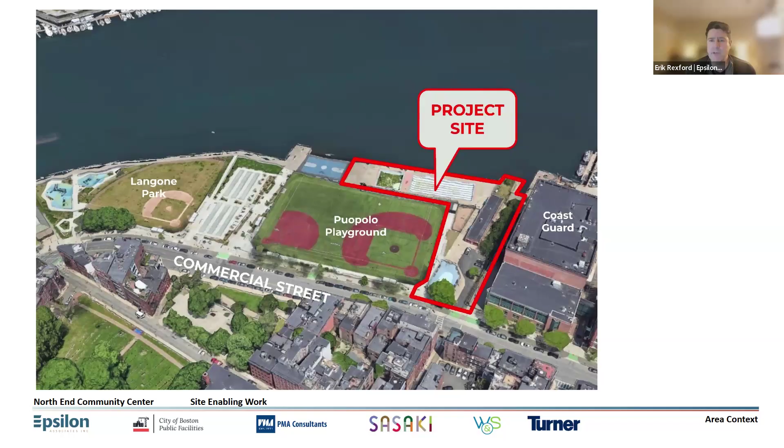Thank you. Okay, who's going? I'm going to go. If you can advance one slide, please, that'd be helpful. So yeah, we submitted a notice of intent for site enabling work at 471 Commercial Street. The location is shown in the area bounded by red. It encompasses the Mirabella pools and the bathhouse, and it's part of the larger Langone Park and Puopolo Field complex.

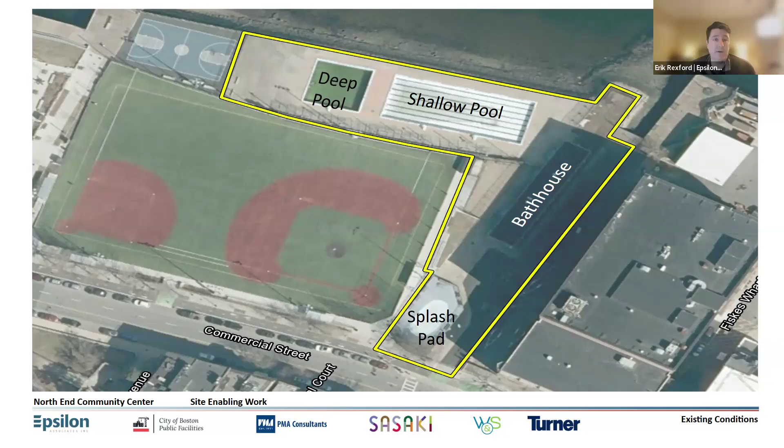Actually, if you jump ahead 2 slides, shows a little tighter view of the limit of work. The enabling work that's the subject of this notice of intent contemplates the demolition of the existing facilities shown on the screen now. So there are 2 pools, a deep and shallow pool, the bathhouse that is along the property line with the Coast Guard facility, and the splash pad. The city is proposing to do this work in advance of a redevelopment of the site to construct the North End Community Center. If you could jump forward 1 more slide.

I'm going to provide a little bit of background. That project will be the subject of a separate notice of intent that will be submitted to the Conservation Commission later this spring. But just to provide some context for the work that's going to be described tonight, we are proposing to construct an approximately 50,000 square foot building that will host or house the North End Community Center. That facility will be operated by Boston Centers for Youth and Families, BCYF.

Much of their programming that currently occurs over at the Nazzaro Center a few blocks away will be relocated to this site. The bathhouse facilities that are on the site today will be incorporated into that design. Redevelopment of the site also will replace the existing pools with modern pool facilities, replace the existing splash pad, construct significant resiliency improvements, and otherwise improve the site with potentially a new Harbor Walk connection as well.

Again, this is all subject of a separate notice of intent. The enabling work tonight is the prerequisite activities we need to do to be able to get to that project. So you could jump forward one more slide, please.

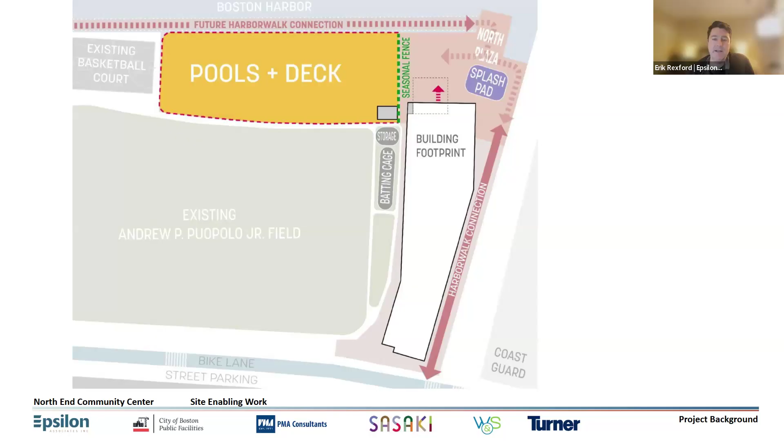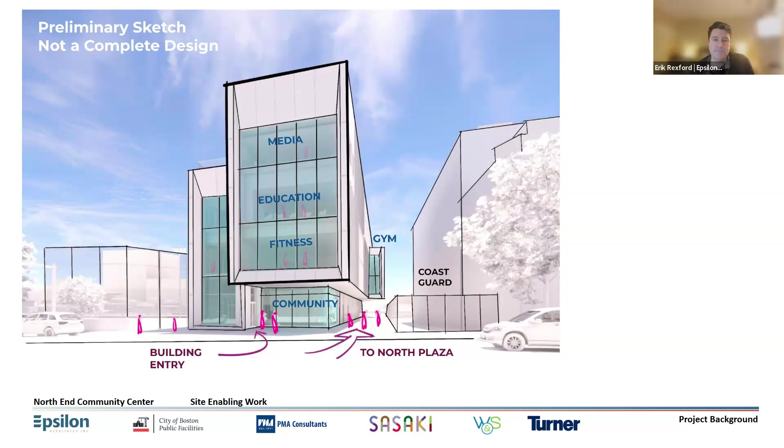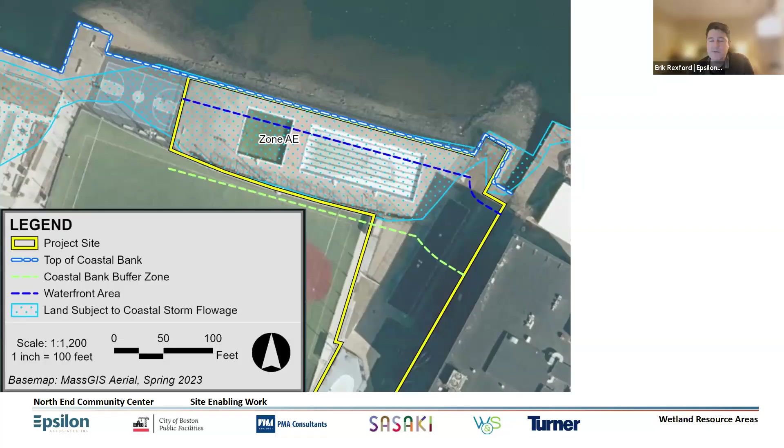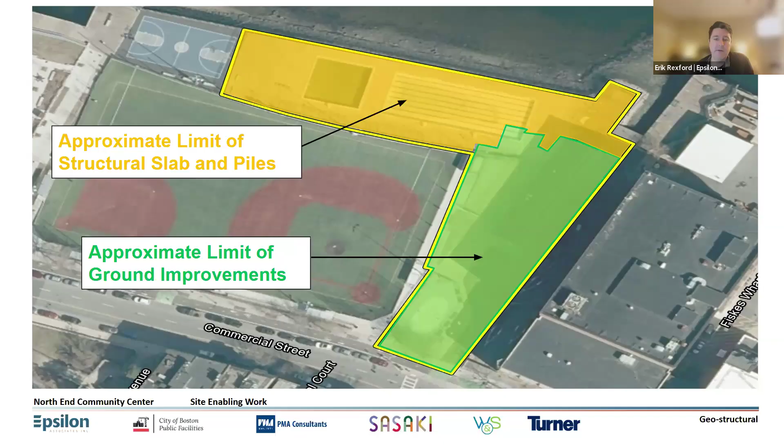And finally, the last tranche of work to be conducted is elevating the seawall. You'll recall from that earlier image looking back towards Commercial Street, the site is actually quite low. And so as part of the redevelopment, one of the primary goals of the North End Community Center project is to improve site resiliency.

Particularly with respect to sea level rise and coastal storms, consistent with Climate Ready Boston and planning documents for the North End. The approach to resiliency primarily is elevating the site, and that includes elevating the seawall. The top of the seawall today is at elevation 16.5 Boston City Base, which for context is about the current FEMA base flood elevation. So we're going up approximately 6 feet to just below elevation 23.5 Boston City Base. That's 3.5 feet above the base flood elevation for a 2070 1% storm.

Again, this will be additive. We're going vertical on top of the existing seawall. That will remain in place. There'll be no further harborward encroachment of the seawall. But we'll also see in this section that was cut, we're picking up a segment of that harbor walk that will be a separate notice of intent. It's purely shown for informational purposes.

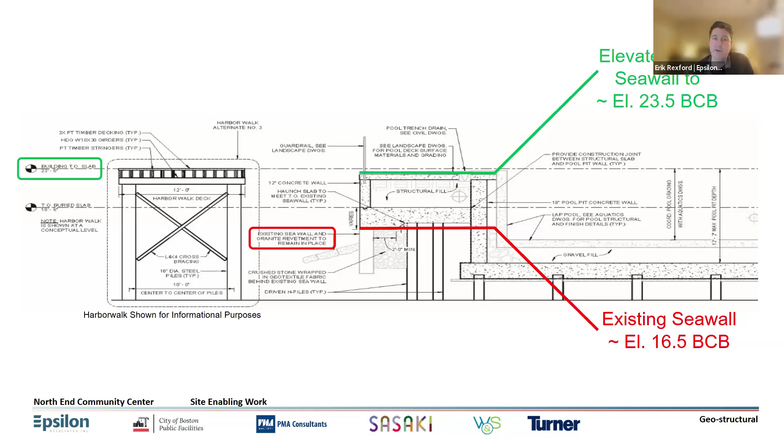Great. Thank you, Erik. As someone who spent a lot of time over there while my daughter was growing up, very, very happy to see this happening.

You had mentioned something about the Harbor Walk connection there, I think from Puopolo over to the Coast Guard station. Is that going to be in the plans? When the NOI comes in, we'll talk about it further, but you said that was a potential. Yeah, that's being carried as an alternative. And I think on the plans that we submitted to the commission, there's a conceptual alignment of that harbor walk in front of the seawall. It'll be a pile-supported structure that's roughly shown on those plans. But yes, that would be included in that second notice of intent for the site redevelopment.

Okay, great. I don't think I have any questions on this. Eleanor, what do you have?

Thank you. Yes, just a few administrative notes. For the record, this project has been assigned a DEP file number that is 006-2103. We have also assigned it a Boston file number, which is 2026-006. Other than that, there are photos in the drive folder for the commission's review from our site visit that happened last Thursday. And as Erik pointed out, this is the initial work, and we are expecting another filing for the rest of the work in the near future. And other than that, there have been a number of community meetings over the last few years to inform the design. So there should be a log of that at some point in the future. And the draft conditions are ready to go for this project.

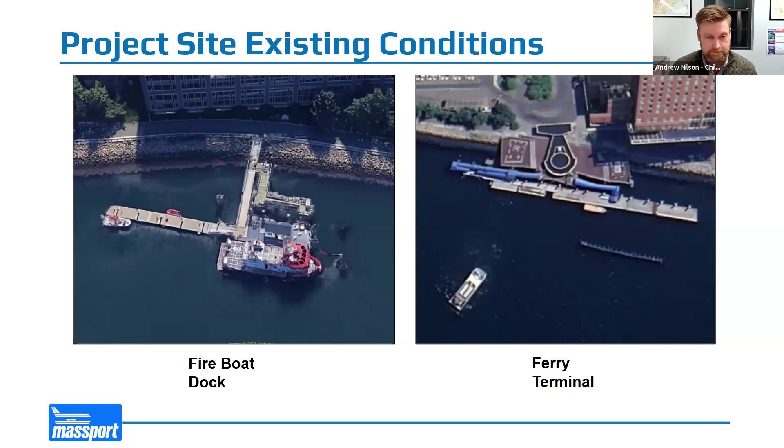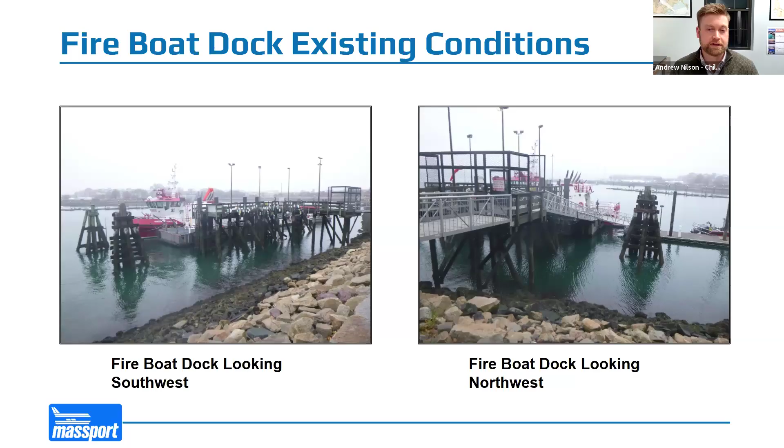Here are a couple of photos taken from the adjacent harbor walk of the fire dock, taken at roughly low tide, which gives a better view of what's there currently. There's a lot of timber piers in the way, so you can't really see the actual fire vessels for Massport Fire. All of these structures are going to be removed as part of the project.

Now the ferry dock. There's no permanent mooring or berthing here - this is all just transient vessels. There's water taxis that access a portion of it. It houses one port for the MBTA Hull, Hingham, and Logan line for the ferries. There's a front loading ferry area and a side loading ferry as well, and a significant portion of it, on what would be the south side, is dedicated to water taxis.

Also included with the ferry dock is a wave screen a little farther offshore from the floating dock, visible in the photo on the right-hand side. It's constructed of timber, and you can see in the photo that there's a lot of material missing - it's rotted away and floated away over the years. This was noted heavily in all the engineering assessments of the facility, that the wave barrier is in significant disrepair at the moment.

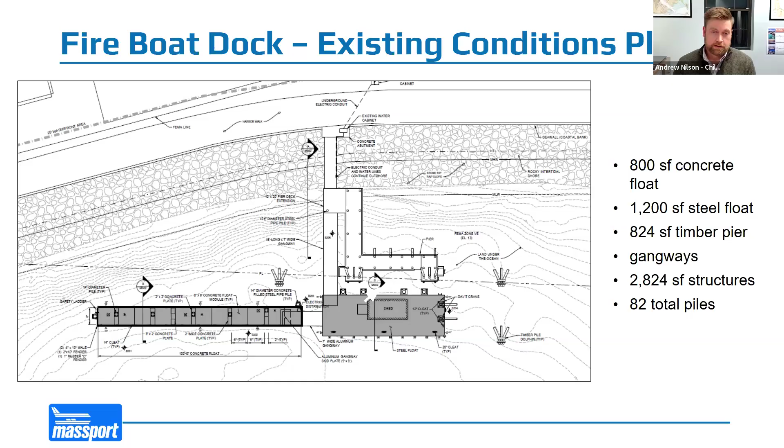A few other important things to note here: we're reorienting the floats just a little bit, particularly the one on the northern side, or the left-hand side of the slide. This relatively minor change actually allows Massport a pretty significant upgrade in the number of berthing areas that they can access.

Massport doesn't really have any intentions, at least at this point, as a result of this project, to increase the number of vessels that they have there. But in the future, if repairs need to be made to one floating dock and not the other, they can move an entire fleet over and out of the way so that work can be conducted — which isn't really the case right now. They're very limited as to where they can move vessels, especially their larger 79-foot American United vessel. They can't really move that anywhere else; they would have to just pretty much leave the Massport site entirely.

So these minor changes really provide Massport Fire with some significant resiliency. Next slide, please.

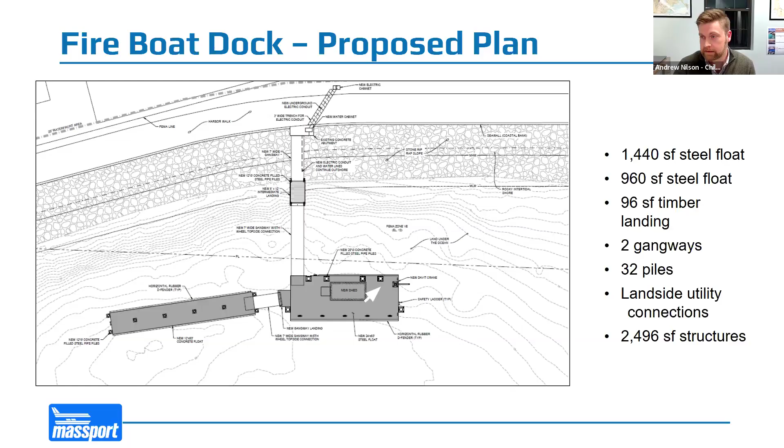Moving over to the ferry terminal, this is more of a repair than a replace. Significant portions of the waterfront facility are going to remain in place. We'll see on the next slide, but there's a pile-supported pier that's going to remain in place, and it's only going to get a few minor repairs to the piles and the concrete deck that will help it last an additional 30 years.

But the actual offshore portion, including the gangways and the floating docks, will be replaced. The timber wave screen currently in place will be replaced in its entirety as well, with a slightly different orientation, as we'll see in a moment. There will also be upgrades to utilities and some of the pedestrian access, making things a little bit nicer and a little bit safer for the pedestrians who use this on a daily basis. Next slide, please.

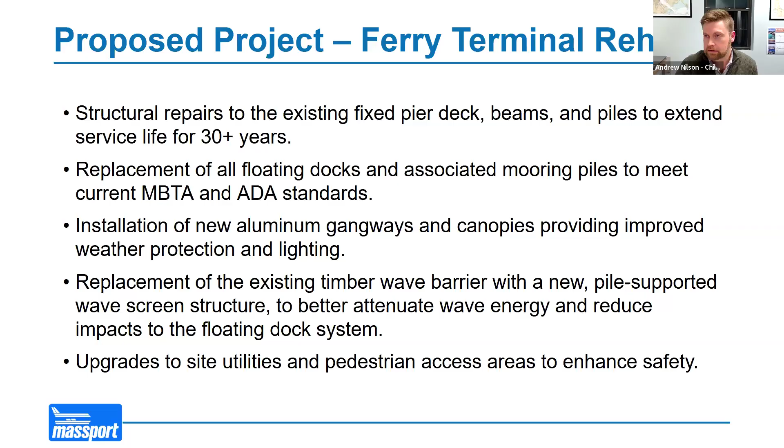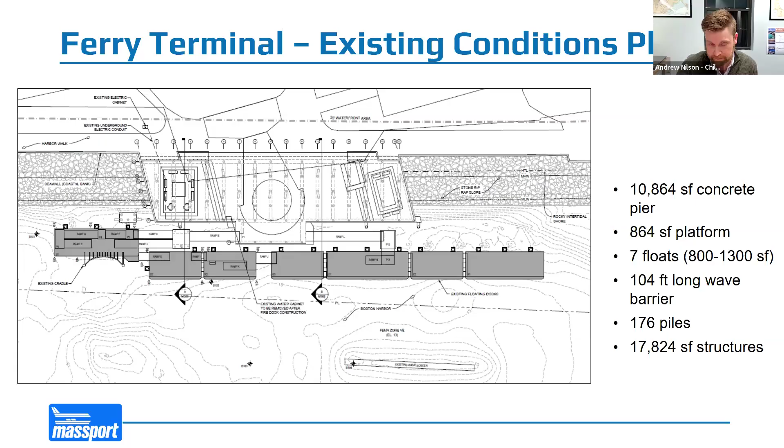At the top of the plan here, there's a pile supported pier. That's the portion that's going to remain in place, and it's only going to receive repairs. There's going to be a lot of repairs happening underneath that, and again, that's not to change the structure in any way, it's just to make sure it can continue to last an additional 30 years.

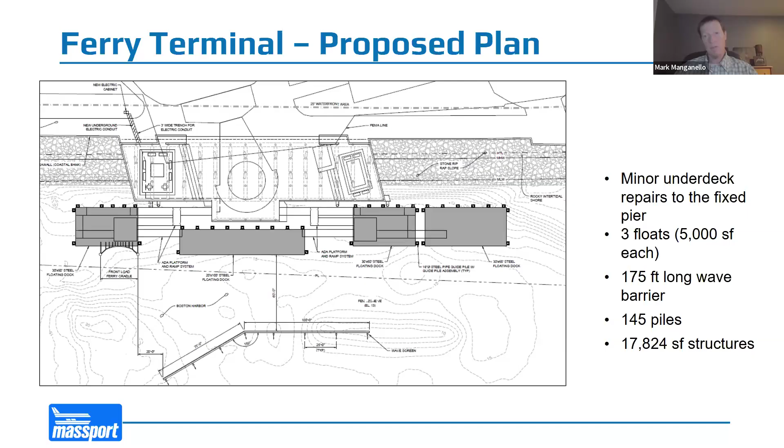And then I'll hand it over to Mark here. Thank you, again, I'm Mark Manganello with LEC Environmental. If you could go to the next slide, please.

So wetland resource areas and impacts. The wetland resource areas associated with this project and the site include land under the ocean, land containing shellfish, rocky intertidal shore, coastal bank, and land subject to coastal storm flowage. The site's also within a designated port area. Rocky intertidal shore is the intertidal portion of the riprap slope that extends along the shoreline, we saw that in a few of the photos. No work is proposed within this resource area. Coastal bank is contiguous with the top of the riprap revetment and the land behind the concrete pier at the ferry terminal. No work proposed on the coastal bank.

There's minor temporary disturbance to the coastal bank buffer zone as a result of utility connections at each structure. These utility connections are depicted on the plans. Land subject to coastal storm flowage is present, the coastal floodplain as mapped by FEMA, it's a velocity zone, elevation 13. The temporary utility disturbances will occur within this resource area, a total of 162 square feet.

Land under the ocean is present, associated with the subtidal areas between the two structures, beneath the two structures, seaward of mean low water. Land containing shellfish is present as well, these are subtidal and intertidal areas around the structures. There were no field surveys conducted for shellfish, but available information indicates the area provides poor quality benthic habitat for shellfish. Project impacts to land under the ocean and land containing shellfish total 158 square feet, resulting from the new piles.

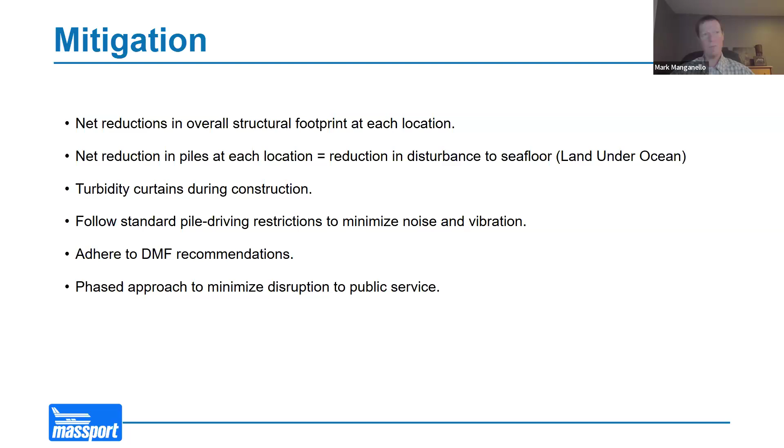So that's the project mitigation. Overall, it will have minimal environmental disturbances and can be conditioned to protect the interests of the wetland resource areas associated with the project. And that's our presentation.

Okay, great. Thank you. So I had a question about the wave barrier. It's being increased significantly and moved, and I know it's being moved to be further protective of the infrastructure there. But you did some wind and wave studies, and it feels like maybe they were confined to protecting the infrastructure. Did you do anything about what the impact of the relocated and enlarged wave barrier would be to adjacent properties, to resource areas?

Yeah, so when we conducted our wave study, we looked at the waves as they extend out beyond the bounds of the ferry dock. One of the goals of the design was to not increase how the waves interact with any of the adjacent structures. So that's why we ended up falling with the shape that we've got.

So do I understand that this reconfiguration is more targeted, and the former configuration, because it was misplaced, might have had more impacts on adjacent properties and resource areas? Is that what you're saying?

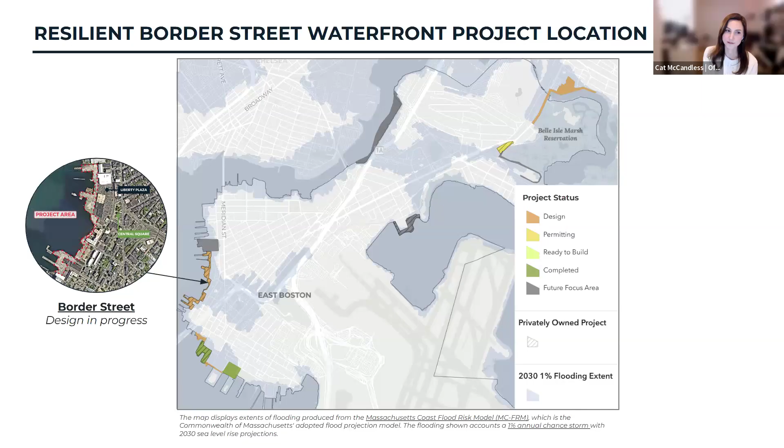A unique aspect of this project is that the land on which the infrastructure is being designed is entirely privately owned. So the city and the private property owners have been working together in partnership to design a coastal resilience solution that protects not only the waterfront properties, but the community as a whole. A big reason the city stepped in to lead this project is that the project area is entirely within a designated port area, which has limited redevelopment of the private properties that would have otherwise enabled the private landowners to do this work independently. So we're stepping in, working with them, to design a coastal resilience solution across approximately 8 private properties. Next slide, please.

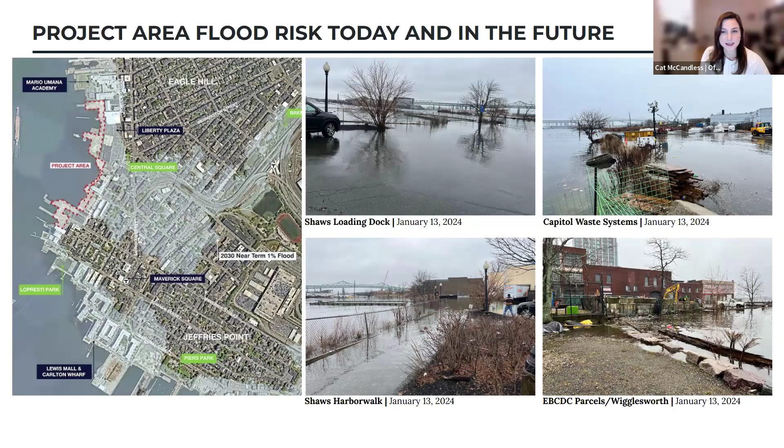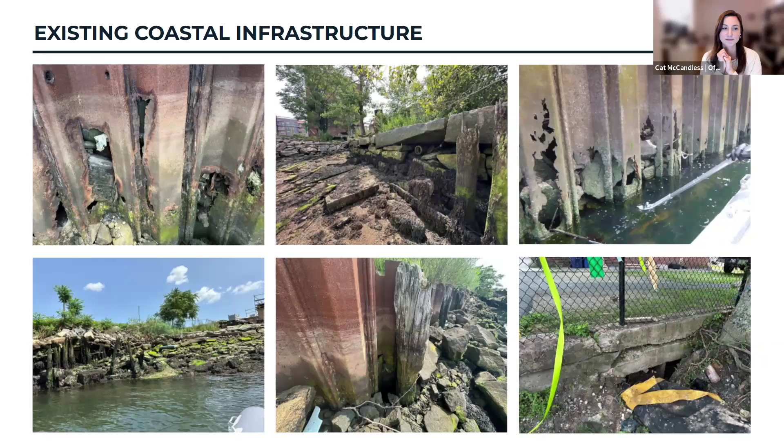So the primary goals of this project are to reduce current and future flood damage, to protect East Boston residents, infrastructure, utilities, and structures from coastal flooding, primarily by repairing the degraded coastal infrastructure and gradually raising the elevation along the waterfront.

Additionally, we are hoping to improve public access, connectivity, and open space along the waterfront where possible, recognizing the constraints of the designated port area, while also maintaining public safety and not disrupting existing uses, particularly any water-dependent industrial uses.

I do want to emphasize that this is not a redevelopment project, so we're not proposing any new or retrofitted buildings as part of this work, but we're just focusing on the coastal infrastructure.

As I mentioned, we are partnering with the waterfront landowners on the design of the project. I want to note that the landowners have all reviewed the submitted RDA and provided permission for this work to take place on their property.

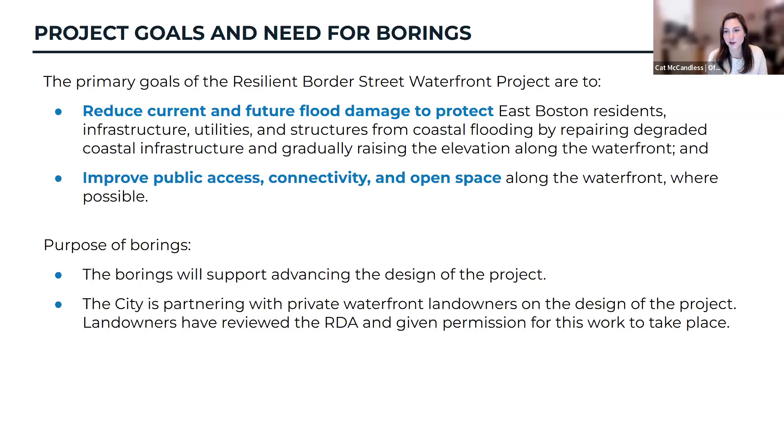So we're just here tonight seeking approval for the borings, and we'll be back at a later date, likely hopefully sometime next year, with a full notice of intent once the design is further along. Now I will pass it over to Hailey to talk about the borings.

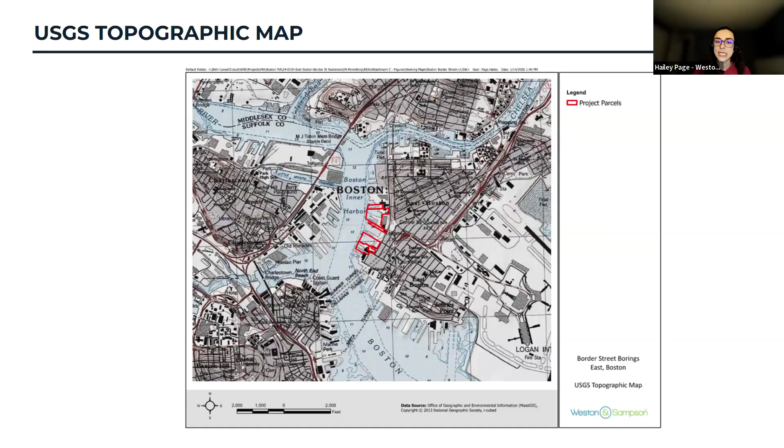This is a bit of a more zoomed in picture with an aerial where you will see these 6 parcels zoomed in further. We are proposing borings at 36 New Street, 60 Border Street, 102 through 124 Border Street, 170 Border Street, 246, 260 Border Street, and 276R Border Street.

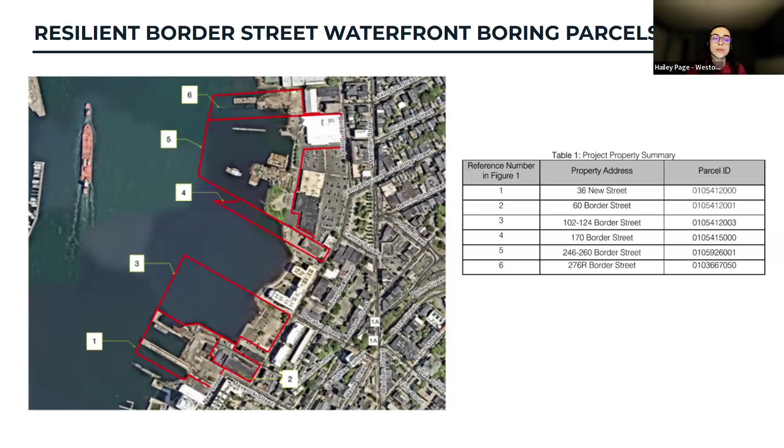This table corresponds with the numbers on this figure, which was included in the submission. So just to note that...

A few of the borings are located within land subject to coastal storm flowage associated with the 100-year flood zone. So across these 6 parcels, the FEMA zone AE spans from elevation 11 feet NAVD 88, or 17.46 BCB, to elevation 10 NAVD 88, or 16.46 BCB.

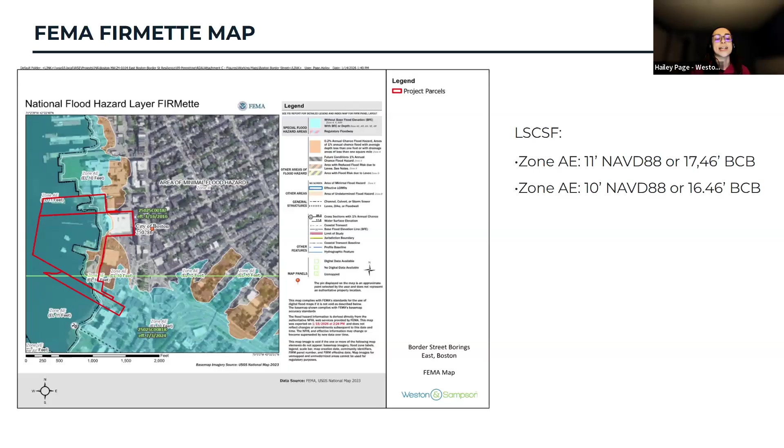You'll see on the figure to the left, the first 3 parcels are located, and then if you flip ahead, you'll see the next 3 parcels are also located within the flood zone.

This table is to summarize where the various soil borings are located. So of the 9 borings, some are only located within land subject to coastal storm flowage and the 100-foot buffer zone to coastal beach and coastal bank.

The work is expected to take approximately 10 days. Sedimentation and erosion control devices will be installed appropriately around each boring location during construction and then removed upon completion. All equipment is proposed to be stored outside of any resource areas or 100-foot buffer zones associated with the site.

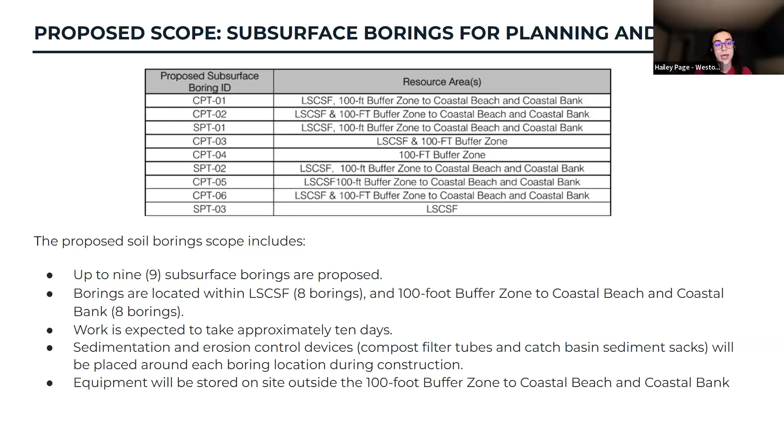As for impacts, we are looking at 6.3 square feet of impact to both land subject to coastal storm flowage and 100-foot buffer zone to coastal bank and coastal beach. All of these impacts will be temporary in nature in regard to the borings and will be restored to the best practical extent to pre-construction conditions.

It is to be noted that a conservative boring diameter of 12 inches was used in these impact calculations to account for the temporary sediment and erosion controls as well.

We just wanted to point out that although there is 25-foot waterfront area, coastal beach, and coastal bank located within the site parcels, there will be no impacts to these areas.

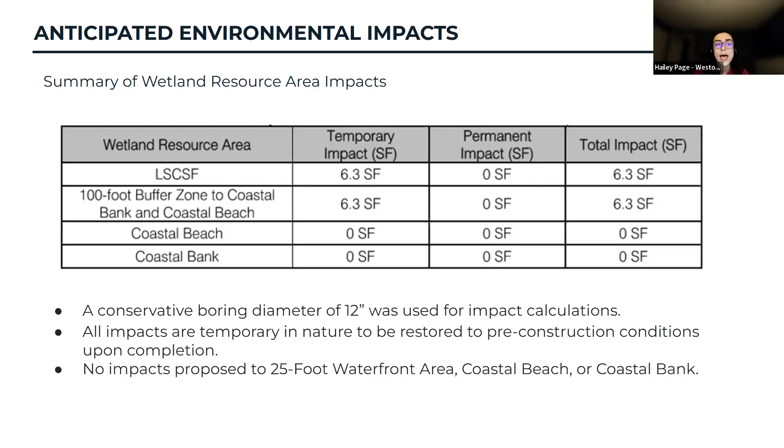But I think we can open it up at this point. Thank you so much for your time.

Great, thank you. I think that's a great idea to leave that slide up. Just a couple quick questions from me.

The photos that we saw earlier during Kat's presentation were dated January 13th, 2024. And I know I should probably know the answer to this, but what happened on January 13th of 2024? Was it a storm? Was it a high tide?

Yeah, this was a nor'easter that we had a couple of years ago. So we have nearly missed a few significant flooding events since, even a few days ago. If the storm had hit us just a few hours at a different point in time, we would have potentially seen more flooding in this area. But that is the last time that we have pretty substantial photographic evidence of the flooding.

Okay, thank you, and excuse me for melding all my nor'easters together here. So, quick question about the properties there.

One was Capital Waste Systems. So what goes on there? Is it what it says, like a recycling center or transfer station? Capital Waste Systems is one of the trash and recycling collecting companies in the area. They have a contract with the city of Boston, but they don't really use this property for their recycling and trash business. There's a building on the property that's pretty much condemned, so there's nothing inside of it. They do have some parking on the part of the lot closer to Border Street, but otherwise it's just used for parking, with no active industrial uses taking place on the site.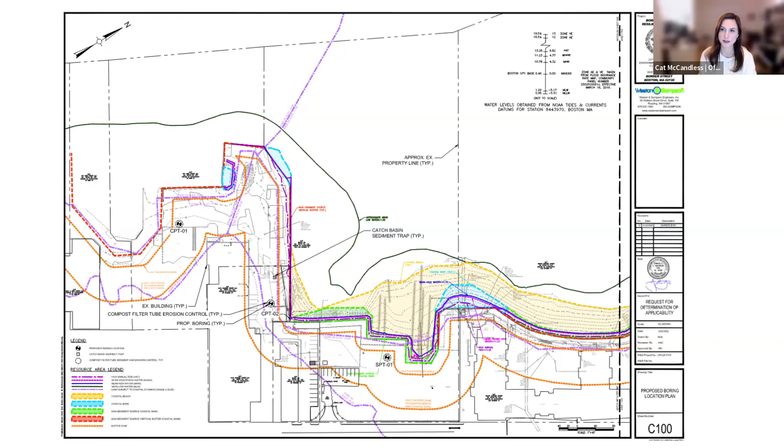Understood, okay, thank you. Elena, what do you have?

Thank you, I think that Cat and Hailey's presentation really covered everything. I did want to flag that we did not conduct a site visit for this phase of permitting, but we intend to do so during the next phase of permitting. And yeah, that's pretty much it.

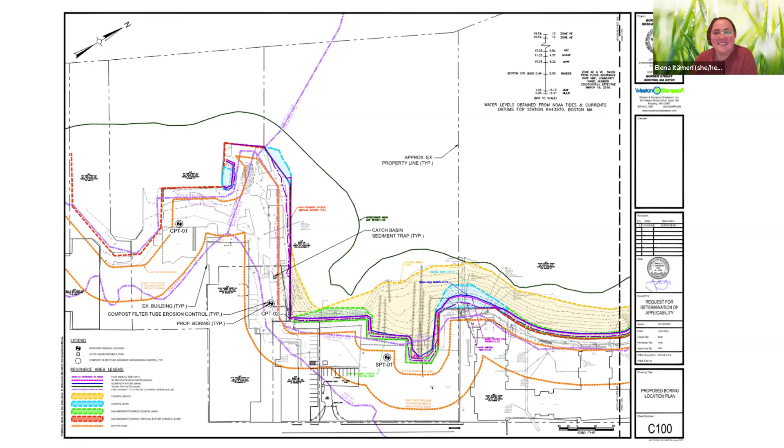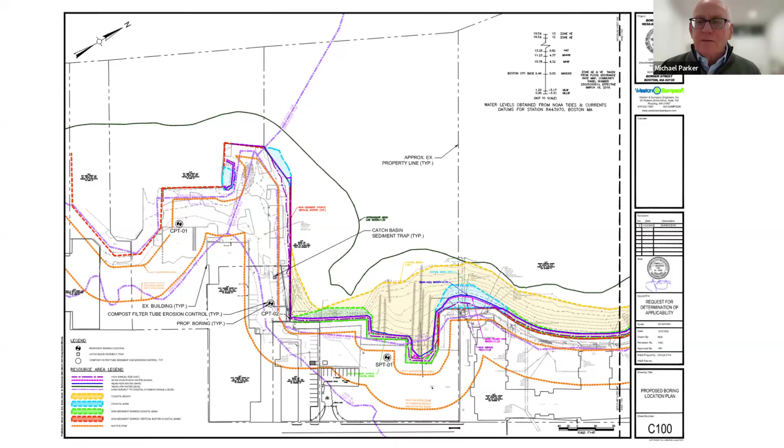Commissioner Sullivan: Did you mention how deep each of these borings are, and are they all the same depth? I believe in the project narrative it depends on the type of boring and where refusal is. I'm not a geotech, I'm an environmental scientist, so just going off the narrative, it looks like up to 10 feet of bedrock rock coring is planned in the upper 10 to 15 feet. So it looks like 10 to 15 feet maximum, but again, I'm not a geotech, just skimming the project narrative right now.

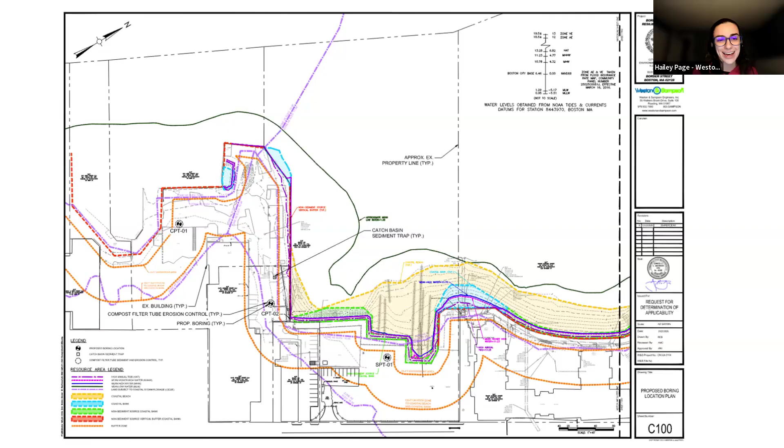Okay, sorry, I apologize. It says depth to about 130 feet below ground surface looks to be the deepest depth that is proposed. And of course, it would be till refusal - they're not going to keep digging if there's nothing to keep digging to.

Right, and when I look at the waterfront, at least downtown, they continually expanded an existing seawall, then somebody added another seawall, then there was a third seawall. Were you able to look at historicals to say where you're trying to put these borings, there's a good chance there's nothing in the way?

I personally did not do overlays. I'm not sure exactly what took place with the geotech team in determining the locations, but I believe that's why up to nine are proposed, so if any of these may need to be shifted from one location to another, there's some variation to make the determination on where the best locations are for the borings to occur.

I can also add that the civil engineering team at Weston and Sampson weighed in on the locations, and part of the reasoning was based on historical information, but also to make sure we had at least one boring per property within the project area. The two different types of borings, CPT and SPT, were selected to ensure we had a spectrum of information collected across the project area, since each site is likely to have a slightly different approach to the coastal resilience infrastructure design. Right, that's all I had.

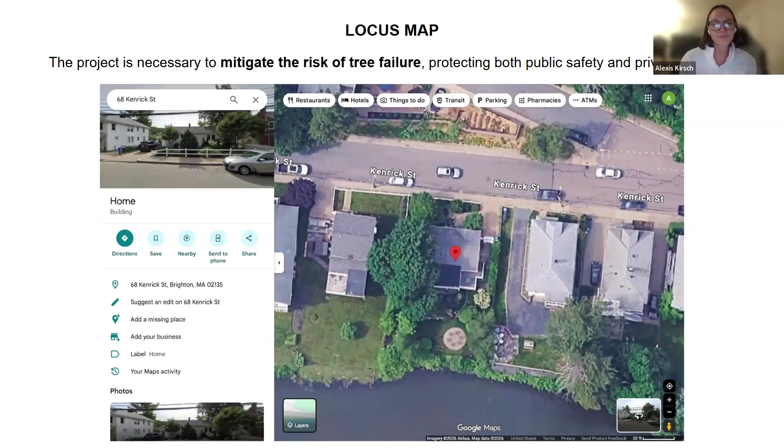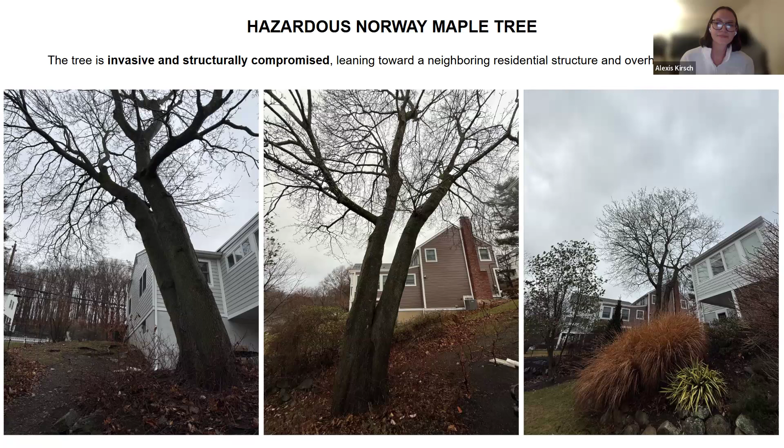Next slide, please. We're a little slow on the slides tonight. There we go, no rush. I might be going faster than you can look at the photos, so no rush.

For the proposed work and impact assessment, crane-assisted sectional removal will be necessary because of the tree size and proximity to the structures and utility lines. Also a chainsaw, a stump grinder, small support equipment, and debris hauling vehicles will be used. As far as the vegetation goes, only the tree and the stump will be removed.

No other vegetation will be disturbed. For the soils and hydrology, the soil disturbance will be minimal and limited to the stump area. No grading, filling, or drainage alterations are proposed. For the wildlife habitat, the removal of a single invasive tree doesn't necessarily reduce habitat value, but it may improve native species establishment.

As far as erosion and sedimentation goes, temporary controls will be used if necessary, and all disturbed soils will be stabilized immediately after the work. All equipment and operations are not in the wetland resource area, and no materials will be stockpiled within the buffer zone. Any wood debris will be removed or reused on site as mulch.

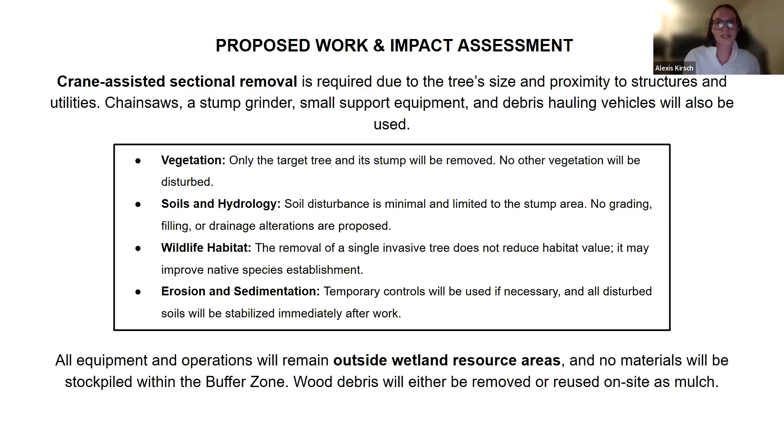Next slide, please. For performance standards and compliance, the proposed activity complies with the Wetlands Protection Act and Boston Wetlands Ordinance performance standards as follows. For the protection of wetlands, no work occurs within the wetlands; the buffer zone disturbance is minimal. For flood control and storm damage prevention, the removal actually reduces the risk of property damage during extreme weather events.

For water quality protection, there will be no pollutants, debris, or equipment entering the wetlands. For wildlife habitat preservation, only one invasive tree is removed, preserving native vegetation and wildlife habitat functions. Where the presumption set forth in 310 CMR 10.54(3) applies, it is not overcome.

Any proposed work on a bank shall not impair the following: this work will not affect the stability of the bank, will not affect the water carrying capacity, will not affect groundwater and surface water quality, will not affect the capacity of the bank to provide breeding habitat, escape cover, or food for fisheries, and will not affect the capacity of the bank to provide important wildlife habitat functions.

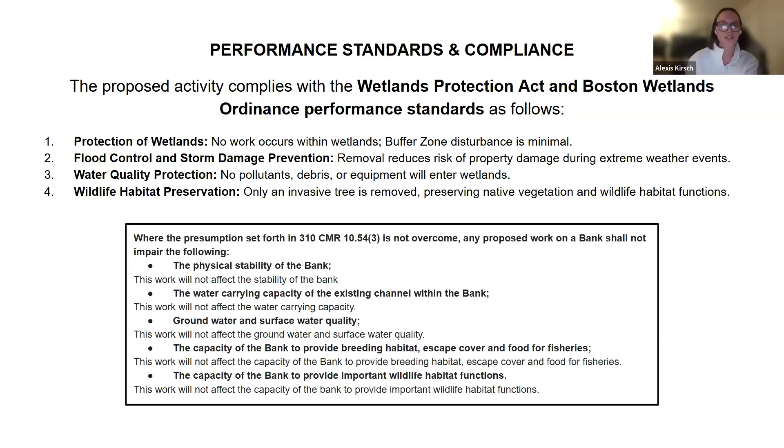Next slide, please. For climate change and resilience considerations, the first is risk reduction. Removing this tree reduces the likelihood of tree failure during increased storm intensity associated with climate change. For public safety and infrastructure protection, proactive removal minimizes risk to the adjacent residential structures, overhead utility lines, and emergency access, particularly during storms.

For buffer zone function preservation, this avoids disturbance to the wetland resource area and maintains the protective functions of the 100-foot buffer zone, including storm damage prevention and erosion control. For ecological resilience, removal of invasive species will support long-term ecosystem health and create opportunities for native, climate-resilient vegetation better adapted for future environmental conditions. For our adaptive management approach, where feasible, native tree planting may be coordinated with a local landscape professional to support habitat value and resilience.

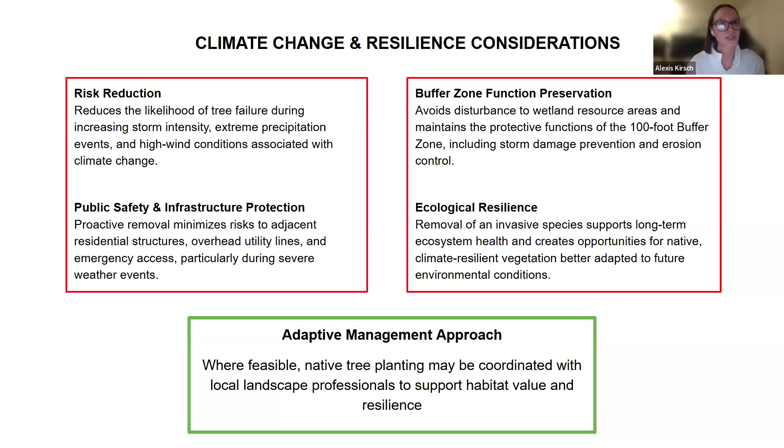Next slide, please. The project should only take one day: pre-work setup, equipment staging, tree removal, stump grinding, debris removal, site cleanup, and if needed, immediate site stabilization. So weather permitting, one day.

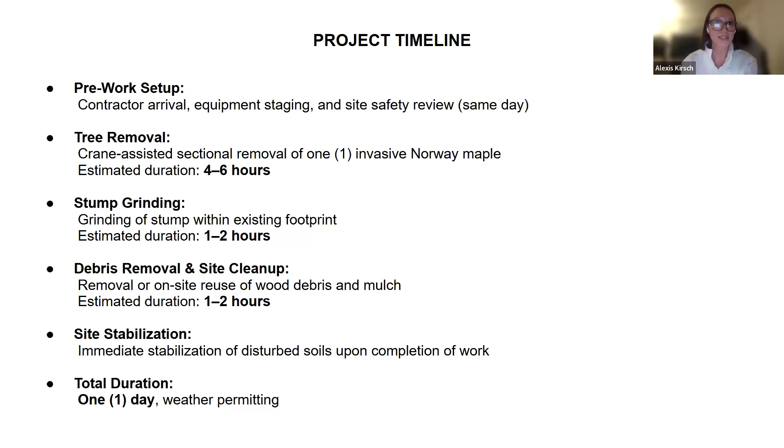Next slide. For further references on the location, I've attached the USGS topographic map, FEMA map, and the other references that were in the slides. You are welcome to contact me through these methods. Thank you.

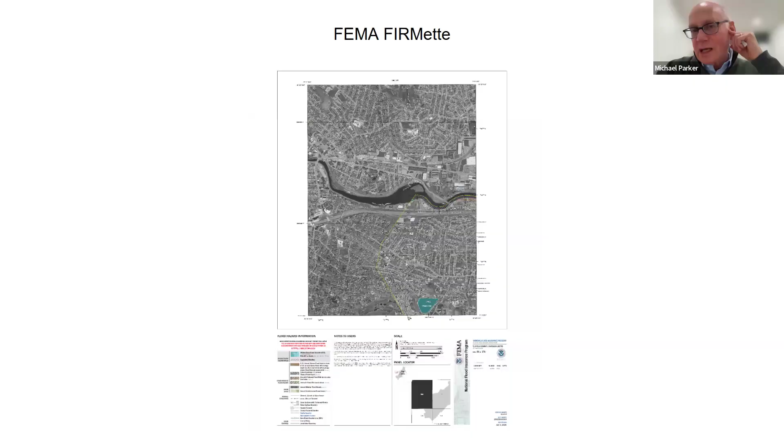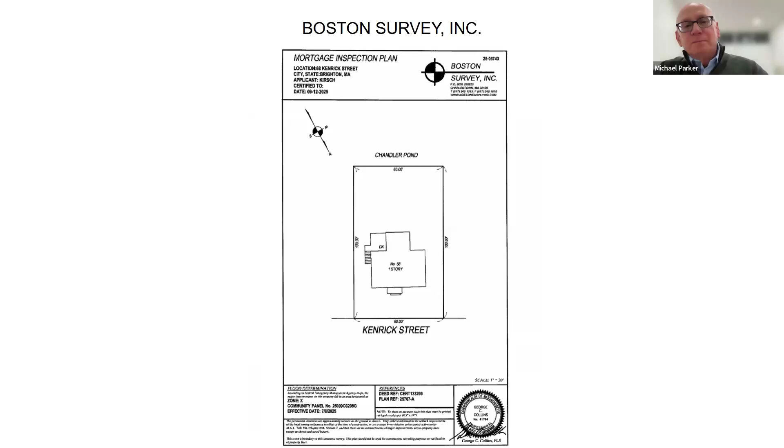Fantastic, that was by far the best presentation we had this evening. Thank you very much. Yeah, appreciate it, very informative. Okay, I don't have any questions on this. Elena? No notes on this either. I just wanted to thank Alexis for hanging in there with us through this process, for being such a trooper through the whole filing process. I couldn't have done it without you, so thank you for helping me hold my hand. Appreciate it. Of course, yes, nothing else to note. I think Alexis might have a side gig here if she wants one. Honestly, that was excellent, for the whole neighborhood. Thank you very much.

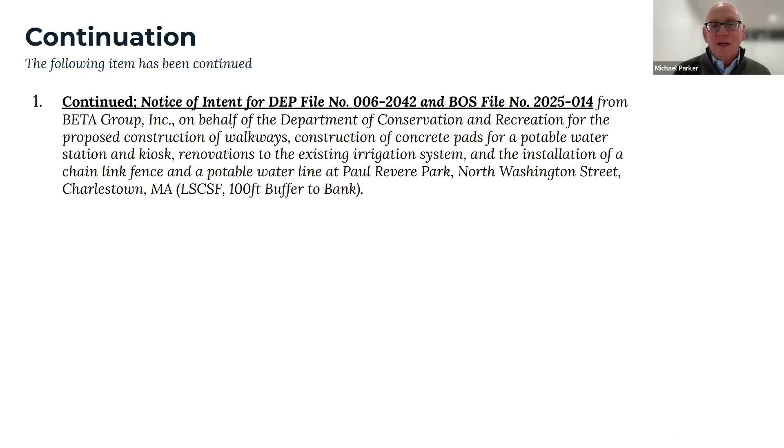Thank you, take care. Okay, there's been a continuance, and that continuance is notice of intent for DEP file number 006-2042 and Boston file number 2025-014. We'll now begin our regular meeting.

The first item on the agenda is a request for a certificate of compliance for DEP file number 006-1657 and Boston file number 2020-020 from RJ O'Connell and Associates on behalf of Barkin Management Company for the renovation of an existing amenity deck located at 1241 to 1255 Adams Street in Dorchester. Resource areas: bordering land subject to flooding, inland bank, riverfront area, waterfront area, and 100-foot buffer to inland bank.

Eleanor, what's the situation here? Staff conducted a site visit on February 19th and confirmed that work had been done in substantial compliance with the order of conditions. We confirmed that there hasn't been any flooding or ponding issues on site since construction, so the stormwater management improvements have been successful. We would recommend issuing a complete certificate of compliance with perpetual maintenance conditions number 44, 46, 52, 65, and 68.

Okay, thank you. The pavers look like they're clean there. I remember this, it took a lot longer to permit than I had expected when they first came in front of us. Does anybody have any questions on this one?

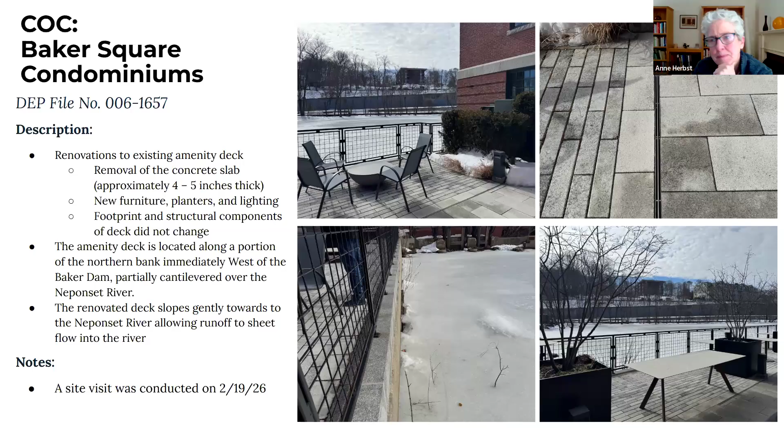Request for a certificate of compliance for DEP file number 006-1834 from Nitsch Engineering on behalf of the Massachusetts Department of Transportation for the proposed roadway improvements located at Cypher Street, Richard Street, E Street, and Fargo Street in South Boston. Resource area: land subject to coastal storm flowage.

What do we have for that one? This project is not ready to be voted on, and the rest of the COCs are not ready to be voted on for a number of reasons. Most of them are just due to not being able to do site visits with all of the snow and actually confirm that work was done in the correct way. So you made me read through it to make sure I was still awake. Apologies, yes.

Administrative updates. The only administrative update we have tonight is for a very similar emergency certification ratification that we had last time around. I wanted to bring it to the commission tonight, but I understand if you would prefer to hold off on ratifying it. I have not done my in-person site visit yet, but we'll be doing that first thing tomorrow morning. We do have photos that were sent, and they look awfully similar to the ones that we received last time.

For folks who either weren't mentally there for that part of the hearing by the end of our hearing last time, or who did not attend, the U.S. Coast Guard base at 427 Commercial Street often runs into an issue with snow management when it comes to blizzard conditions. The weight of the snow starts to become a structural hazard, so they reached out to us about a month ago when we had the first big snow and asked for permission to dispose of the clean, freshly fallen snow into Boston Harbor.